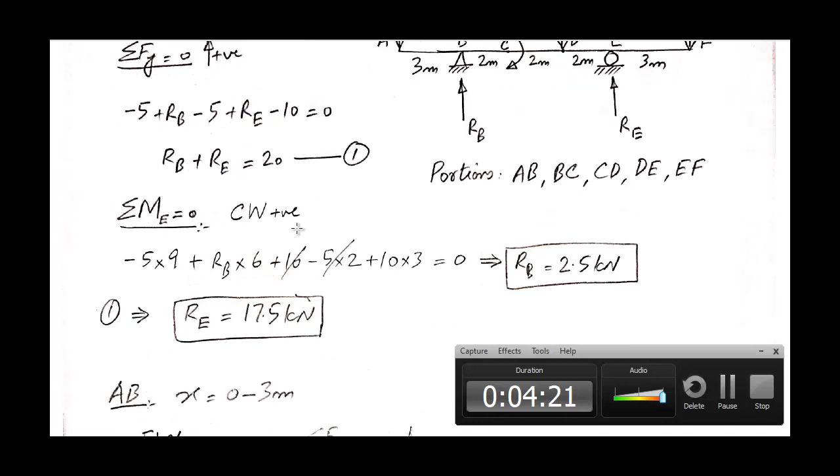So portion AB is from 0 to 3 meters, and here is the free body diagram of portion AB. This is the free end, it's point A section, and these are exposed forces: shear force in the downward direction and moment in counterclockwise direction. The x will start from the extreme left end.

One particular reason of selecting this problem for this week is that some students get confused when they see an overhang portion at the beginning, because they assume that x should always start from a support. So I want to clarify that that's not the case.

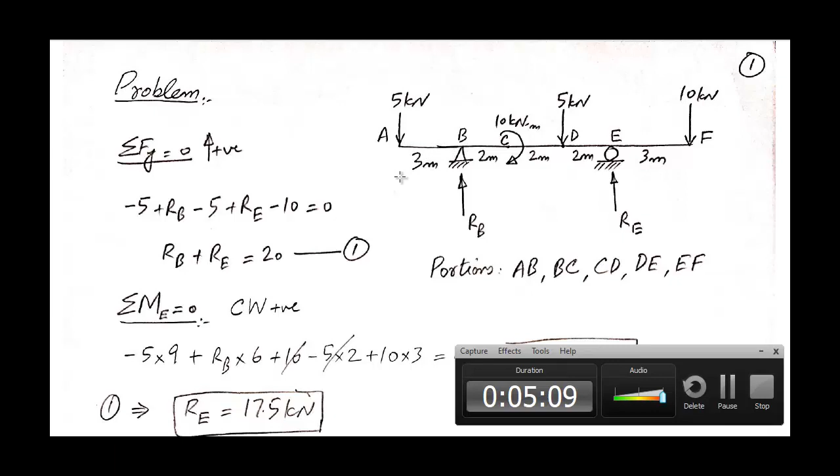In our case, we will always consider x starting from the extreme left end, whether there is a support or not. So x is starting from this point.

Now we can simply apply the conditions of equilibrium to get the equations of shear and moment. Sigma Fy equal to 0 with upward forces as positive: 5 kilonewton force is acting in the downward direction, so minus 5, and V is also acting in the downward direction, so minus V, and this gives us V equal to minus 5 kilonewton.

There is no x involved in this equation, which means that the value of shear is constant for the entire portion. Next is the equation of bending moment.

For that, we'll take the sum of moment about the section, sigma Mx equal to 0, with the convention clockwise moment taken as positive. The 5 kilonewton force will produce moment in counterclockwise direction about the section, so minus 5x, where x is the lever arm, and this M is producing moment in counterclockwise direction, so minus M. If we rearrange this, we get M is equal to minus 5x.

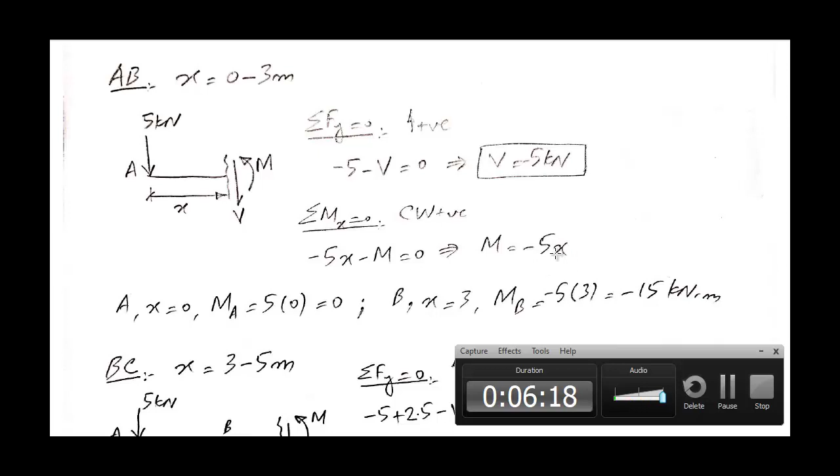X is present in this equation, which means that the value of the moment changes with the variation in x. So we will calculate the value of moment for point A and point B. At point A, x is 0, so MA comes out to be 0, and at point B, x is 3, and MB comes out to be minus 15 kilonewton meter.

Now we are getting 0 value of moment at point A. Is this logical? If you look at point A, it is a free end, and there is no point moment acting at this free end. We have discussed earlier that if we have a free end and there is no point moment acting at that free end, the bending moment will be equal to 0 at that free end. So the 0 value of bending moment at point A is logical.

Next portion is portion BC. The range of x for portion BC is 3 to 5 meters. Starting from this point up to this point, so it is 3 to 5 meters. This is the free body diagram of the entire left side of the beam. We have a hinge support here, point load 5 kilonewton acting in downward direction at point A, and we have a support reaction 2.5 kilonewton at point B. This distance AB is 3 meters, and we have exposed shear and bending moment.

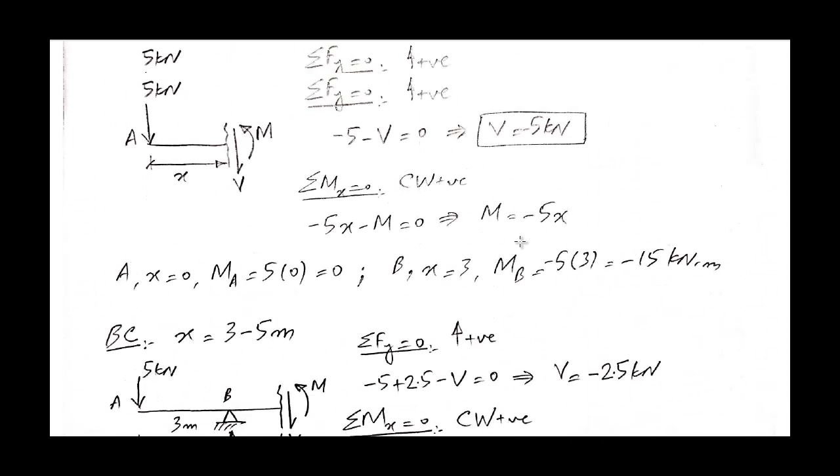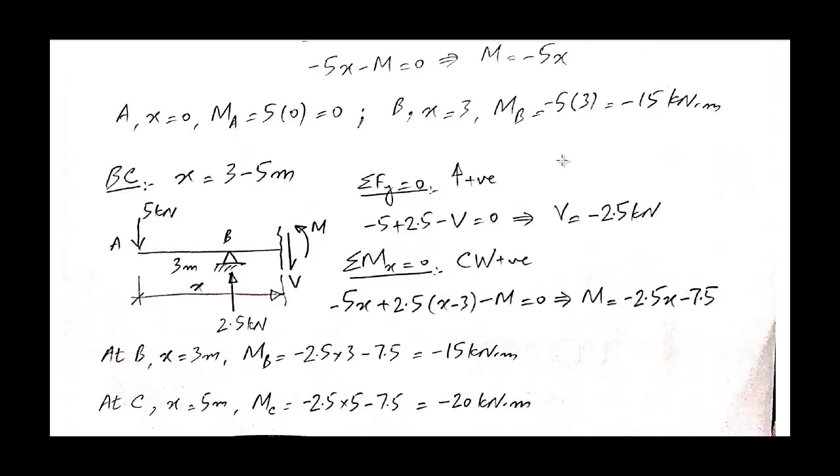How much was the value of bending moment for point B from point A side, from portion AB? If you look at the value of MB from portion AB, it is minus 15 kilonewton meter, and from portion BC, again we are getting the same value, minus 15 kilonewton meter. So it means that our calculations are correct.

There is another point to note here: although we have a hinge support and there is no external moment acting at the hinge support, still we have some value of bending moment at this hinge support. The statement that at a hinge support, if there is no externally applied moment, the value of bending moment will always be equal to 0, that is true for external hinge and external roller support. Now this hinge is not an external hinge anymore because we have an overhang present on the left side of the hinge support. That is why even though there is no externally applied moment at this point, still we have some value of bending moment at this support.

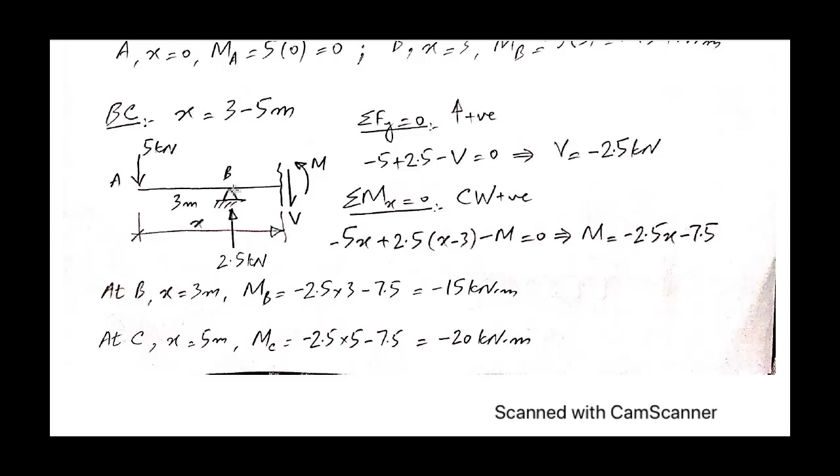Okay, so next is portion CD. This is the free body diagram for portion CD. We have points A, B and C present on the left side of the section, and this time this moment is also included. We have the reaction of 2.5 kilonewton acting here. We have exposed shear and bending moment. The range of X is from 5 meters to 7 meters. Let's apply the conditions of equilibrium.

Sigma Fy equal to 0 first. So 5 kilonewton force is acting in the downward direction, positive 2.5 kilonewton is acting in the upward direction, minus V is acting in the downward direction. This completes the equation for shear, and if we rearrange the equation we get V is equal to minus 2.5 kilonewton.

Next, the equation of moment, sigma mx equal to 0. Starting from this side, 5 kilonewton force is producing moment in counterclockwise direction about the section, minus 5x. Then this 2.5 kilonewton force is producing clockwise moment, so plus 2.5 into x minus 3. X is this entire distance and this 3 meter is this distance, so the distance between the load and the section is x minus 3.

And then we have this 10 kilonewton meter couple acting in clockwise direction, and as it is a moment, we do not need to multiply it with any lever arm, and since it's acting in clockwise direction, it should be taken as positive. Lastly, minus m, that is this exposed moment. If we rearrange this equation, we get m is equal to minus 2.5x plus 2.5. Now if we plug in the value of x for point C and point D, we get the moment at point C equal to minus 10 kilonewton meter, and for point D we get minus 15 kilonewton meter.

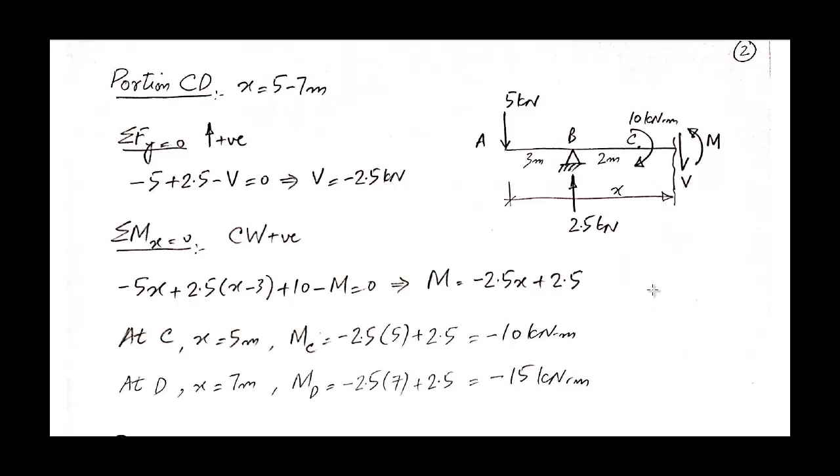If we apply sigma Fy equal to 0, we have 5 kilonewton load acting in the downward direction plus 2.5 kilonewton force acting in the upward direction minus 5 kilonewton, and then minus V, that's the exposed shear, and that should be equal to 0. When we rearrange the equation, we get V is equal to minus 7.5 kilonewton.

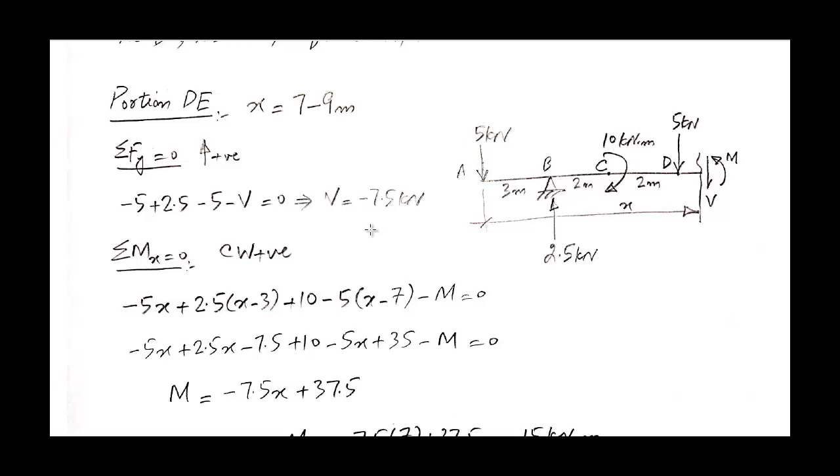Then the equation of moment, sigma Mx equal to 0, with clockwise moment taken as positive. So 5 into x, and this is producing moment in counterclockwise direction, so minus 5 into x. Then this 2.5 kilonewton force producing moment in clockwise direction, 2.5 into x minus 3, and then this 10 kilonewton moment acting in clockwise direction, so plus 10, and minus 5 into x minus 7. The 7 is the distance between point A and the 5 kilonewton load, so x minus 7 is the distance between the point load and the section.

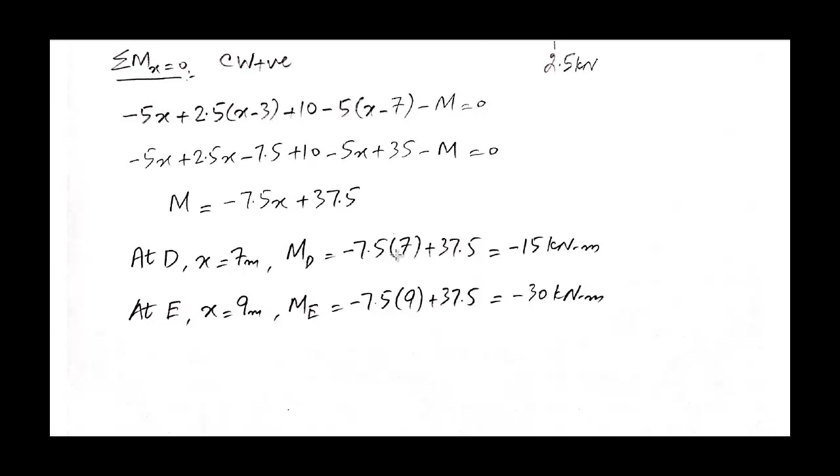So 5 into x minus 7 minus m equal to 0. If we rearrange this equation, we get m is equal to minus 7.5x plus 37.5, and x is present in this equation. It means that the value of moment varies as the distance from the section changes. So for point D and E, when we plug in the value of x, we'll get the value of MD and ME. MD comes out to be minus 15 kilonewton meter and ME comes out to be minus 30 kilonewton meter.

Now let's move to the last portion, portion EF. For portion EF, x ranges from 9 to 12 meters, and this is the free body diagram of the entire left side of the beam when we cut a section through portion EF. Exposed shear and bending moments have been marked, and this time both the reactions are present in the free body diagram.

So if we apply sigma Fy equal to 0, we get minus 5 plus 2.5 minus 5 acting in downward direction plus 17.5 and minus V. This is equal to 0. So V comes out to be 10 kilonewton in this case.

And then for sigma Mx equal to 0, when we take clockwise moment as positive: 5x with the negative sign is the moment due to this force because it's producing moment in counterclockwise direction. 2.5 into x minus 3, where x minus 3 is the distance between the 2.5 kilonewton force and the section, and then plus 10 because it is in clockwise direction, and then minus 5 into x minus 7 is the moment of this 5 kilonewton force, and then plus 17.5 into x minus 9 is the moment of this force, and then minus m.

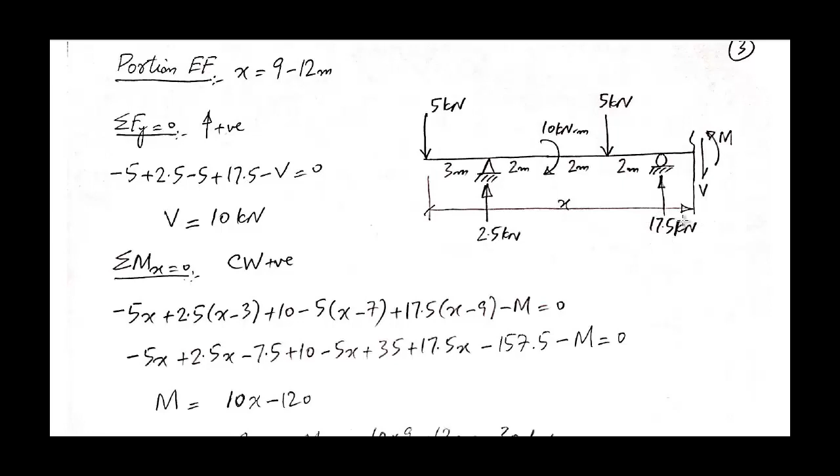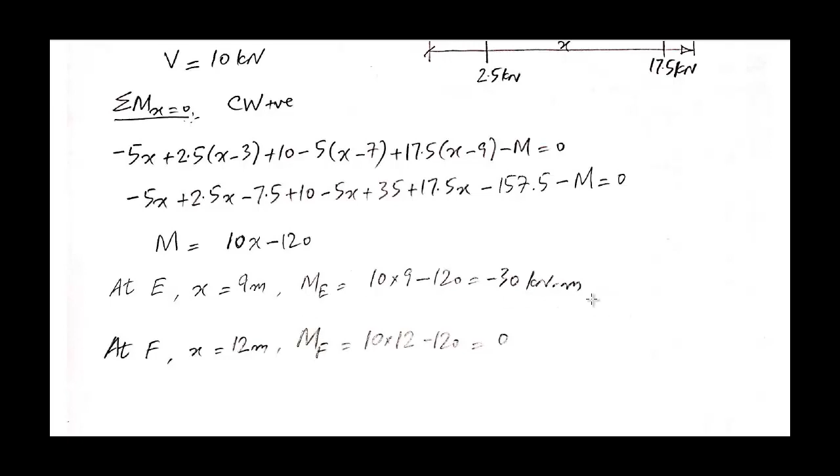If we rearrange this equation, we get m is equal to 10x minus 120. For point E and F, if we plug in the value of x as 9 meter and 12 meter respectively, we get the values of ME and MF. ME comes out to be minus 30 kilonewton meter. If we compare this ME with the previously calculated ME, it's the same, minus 30 kilonewton meter. And for MF, it's equal to 0.

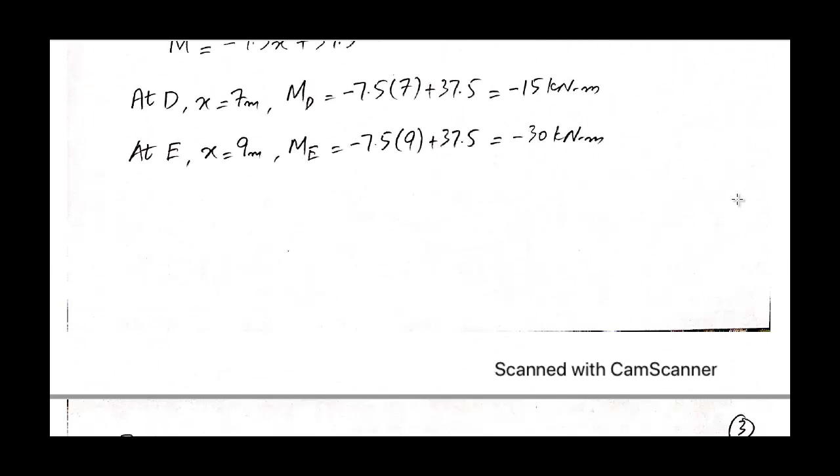At point F, what do we have? At point F, this is a free end and there is no externally applied moment acting at point F. So the moment at F should be equal to 0, and we are getting it as 0.

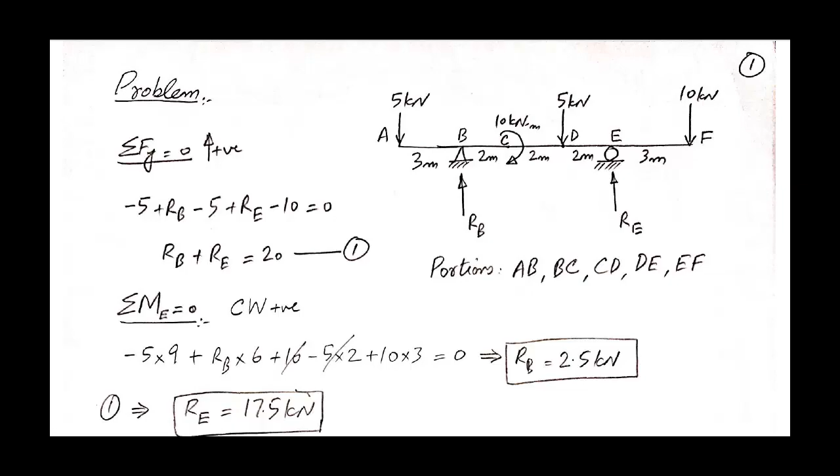So that seems correct. Now the last stage is to draw the shear force diagram, bending moment diagram and elastic curve. For that, we will consider the beam once again. So I have drawn the beam here, and then wherever we expect a change, at that point we will draw a guideline. So draw the beam and then draw the guidelines.

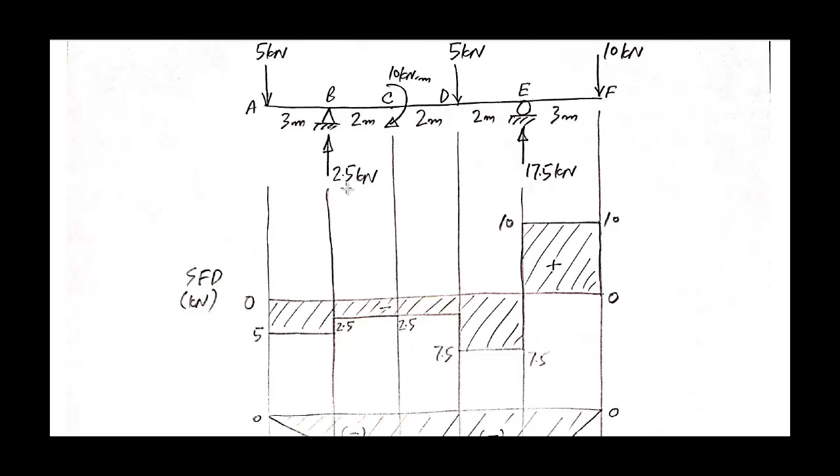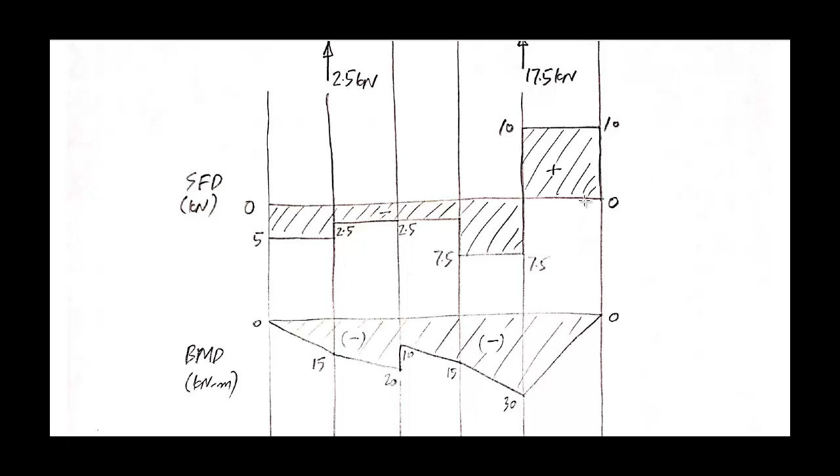Then plotting of this shear force diagram and bending moment diagram is merely plotting up of those values that we have already calculated. Shear force diagram and bending moment diagrams, both these diagrams are not very complicated in this case because we have just point loads and point moments. There is no UDL or VDL, so there was no question of convex up or concave up in this case. So just plot these values and you will get the shear force diagram and bending moment diagram.

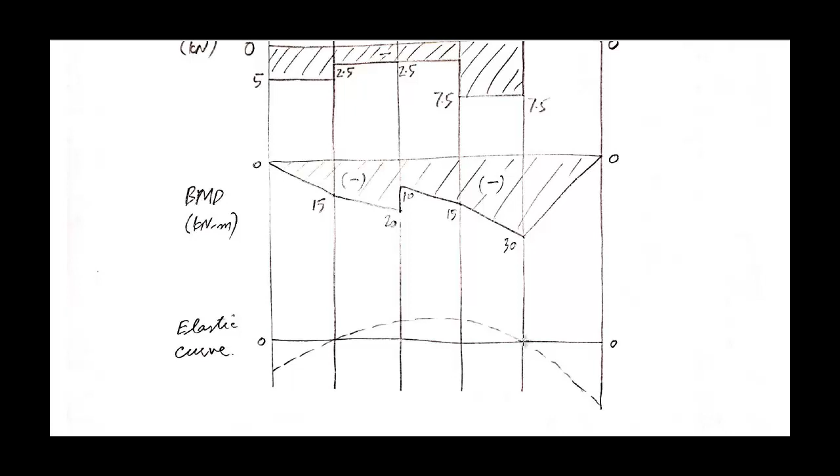If you notice, the entire bending moment diagram for this case is negative, which means that the entire beam will hog. So I have drawn an elastic curve that is hogging, and one thing we need to keep in mind is that the elastic curve must always pass through the support. So we have a support here and a support here, and the elastic curve is passing through these points. This completes our discussion about this problem. So I will just stop recording here. Thank you very much.